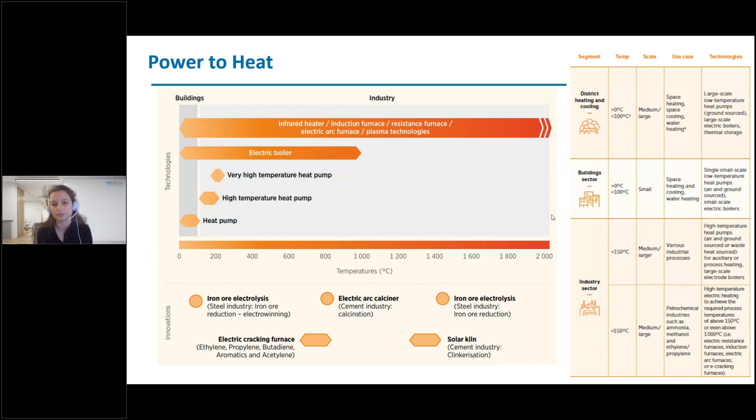Then we have industries that need much higher temperatures than that, and for that there are different solutions emerging, such as e-cracking for chemical industries, or solar kiln for cement industries, among other innovations. In our report, we focus especially on 3 segments: district heating and cooling with medium to large heat pumps as the main technology, the building sector with smaller heat pumps, and the industry sector where we look more at high temperature heat pumps and other technologies for even higher temperatures that are not yet fully commercial or are more underdeveloped.

But heat pumps are key for electrification of buildings and for power to heat when we talk about lower temperatures, because they are highly efficient. They provide the heat requirements in buildings, and they also have a reverse mode for provision of heating and cooling. So we see the prospects for heat pumps are huge.

Today we have electricity share in buildings at 34%, but we need to increase to 53% by 2030 and 73% by 2050. That means much more heat pump deployment in buildings.

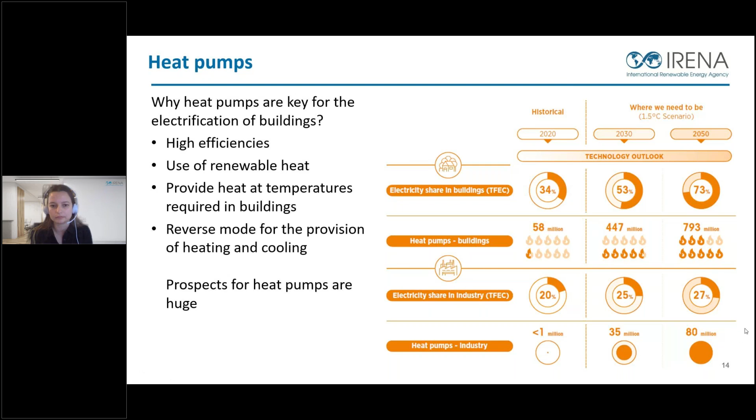For example, in the number of heat pumps, IRENA study says that today we have around 58 million heat pumps deployed, and we need to reach by 2050 almost 800 million. So a lot more deployment of heat pumps in buildings, but also in industry, as you can see, from less than 1 million today to 80 million in 2050, along with further improvement in higher temperature heat pumps.

Heat pumps are also becoming more and more competitive. We see relevant cost reductions in the markets on heat pumps, and that heat pumps can benefit enormously from economies of scale. In this graph, you see how the cost in existing buildings and new buildings in Germany drops from smaller heat pump capacity to larger capacity, and we see a significant decrease as heat pumps get bigger. So economies of scale is an important factor.

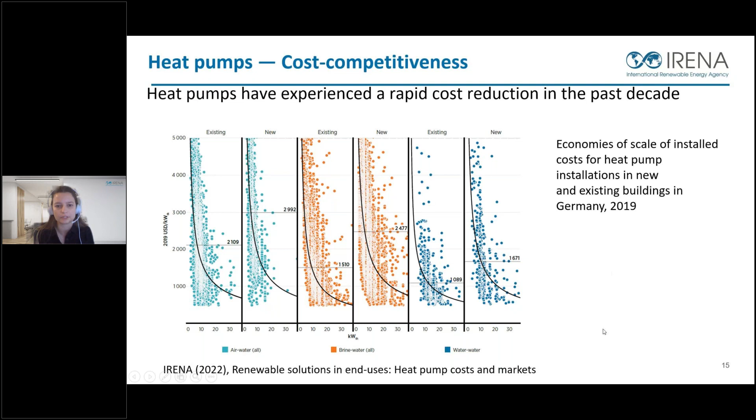Also, there is no big difference in the cost of heat pumps in new buildings versus existing buildings. So electrifying and retrofitting the building through electrification of the heat is not a big difference in cost, as can be a misconception. But we're not talking about the envelope and the increasing of energy efficiency of the building.

But outside Europe as well, heat pumps are picking up. In China, in 2018, 48 million room air conditioners were sold, and heat pumps also saw an increase in recent years. In Japan, already 86% of households have at least one room air conditioner unit. Japan is probably the region with the most heat pumps. And in the US, we see heat pumps reach almost 4 million in 2021, more than twice what was in sales in 2010.

Coming back to the systemic innovation approach, here with what we identified in the report, the 35 key innovations that we show to policymakers are important for creating a smart electrification strategy for electrifying heating and cooling in their countries. As I mentioned, we identify innovation in technology and infrastructure, but it goes beyond that.

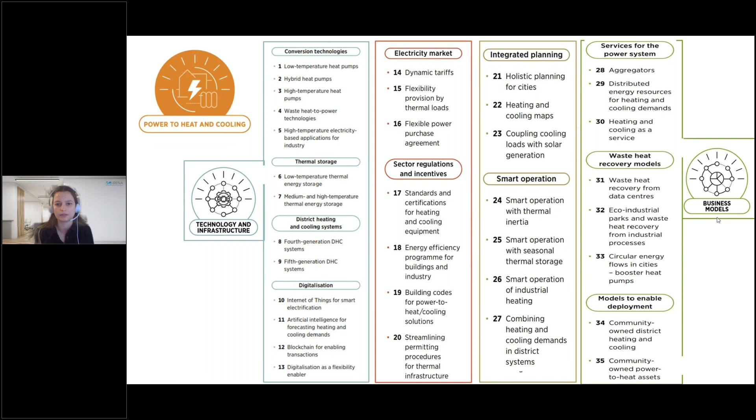On the business model side, we look at different services that heat pumps can provide to the power system and can receive remuneration for that. Waste heat recovery models are very important to increase efficiency, and also different models to enable deployment. So I will not go one by one, but this is the list of 35 key innovations that we identified in the report, signaling that these are important for policymakers to look at the whole picture when they want to smartly electrify the heating sector in the country, and to make sure elements for a practical on-the-ground solution are covered.

System planning and holistic planning for cities, aggregators - these are a few innovations important from the beginning, because of course they don't go through all 35 innovations at once. There are also steps, some come later, some come depending on the low-hanging fruit, but there are a few that are in an essential kit.

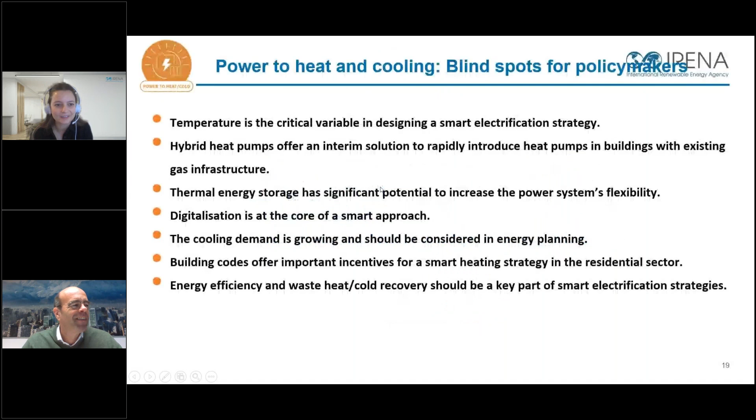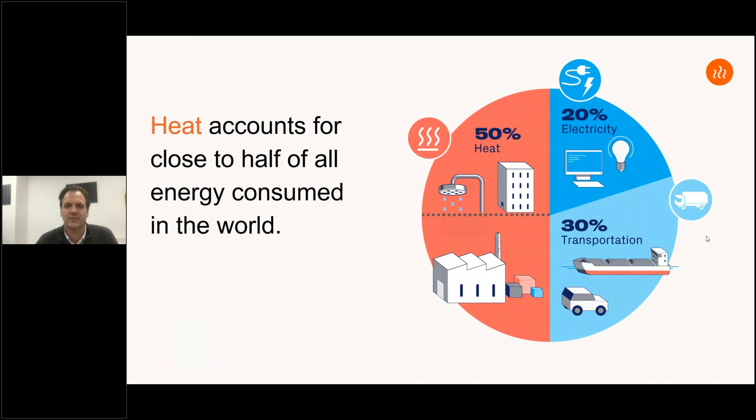Heat is an essential ingredient for many production processes, from brewing beer, pasteurizing milk, dyeing clothes, or sterilizing medicines. Heat accounts for close to half of all energy consumed in the world, and of that half is domestic, with the other half industrial. The industrial sector requires hotter temperatures than domestic, and displacing this has been one of the greatest challenges to industry as it shifts towards a greener path. Businesses are desperate to escape volatile energy costs and are under enormous pressure at board level to hit net zero.

Energy storage unlocks cheap energy from on-site solar, especially given the plummeting cost of solar, and in Caldera's case, not having to connect to the grid. Caldera gets away from this need by creating a separate microgrid with connectivity to the main grid limited to its existing size, absorbing all of the solar load directly into storage. This means no waiting for costly grid infrastructure work on solar projects. A 20 megawatt solar array can now work with a 1 megawatt site-to-grid connection.

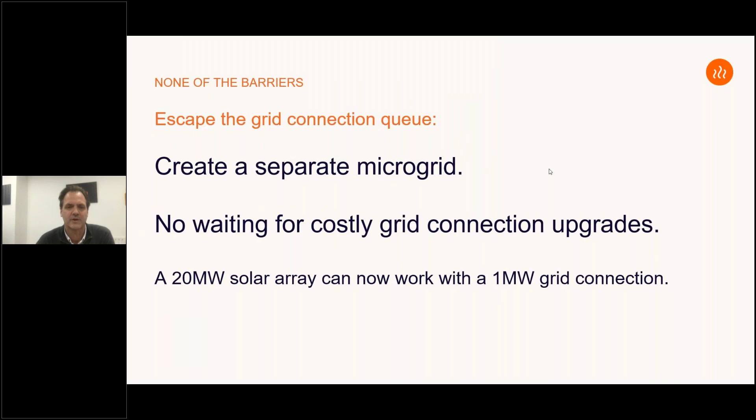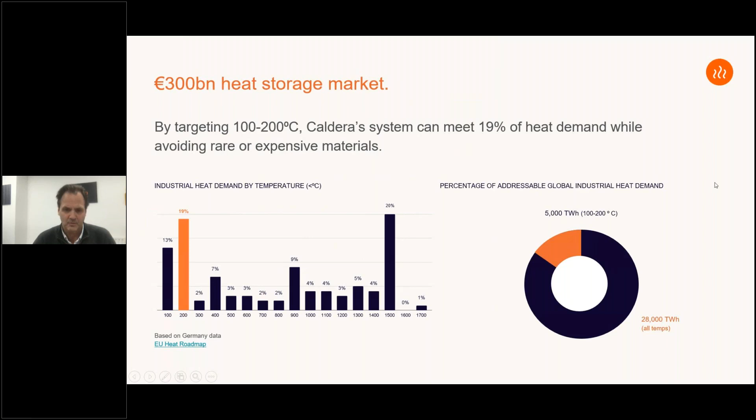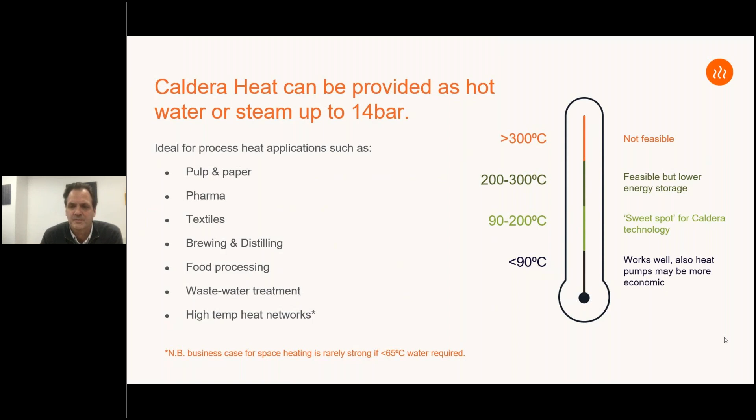If you go higher, you get into specific industries, such as cement production at around 900 degrees C, and glass and steel at 1500 degrees C. The ideal target for Caldera is between 100 and 200 degrees C, which represents 19% of this energy storage market, and that's large. It consists of most factories with steam networks providing up to 14 bar steam and 200 degrees C, covering processes in pulp and paper, pharma, textiles, brewing and distilling, food processing, and waste-water treatment.

Caldera has developed a commercially viable product that can be easily deployed and scaled, and we're looking for early sales. Our systems are modular and expandable. We locate them close to where the heat is being used, transferring solar field energy using high voltage electric cables directly to the stores. Each store can provide 4 megawatt hours of storage, charging at 1 megawatt and discharging at 650 kilowatts. We combine multiple units to create larger storage systems up to 200 megawatt hours with the ability to absorb 50 megawatts of power. The whole storage system is around one third of the cost of lithium-ion batteries.

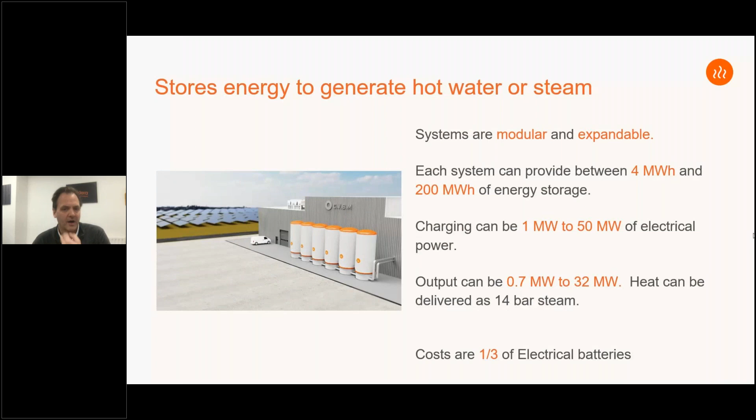What I'd like to do now is take you through a business case, a factory we've been looking at within the UK, where we can say that even with the British sunshine, we can get a good business case. The example shows a factory with a €2 million per year energy bill that can be reduced to €1.2 million with 5 megawatts of solar and 4 megawatt hours of storage deployment. That's a €0.8 million saving with a 27% carbon saving and a simple 4.4 year payback.

Looking at the detail, you can see how the 5 megawatts of solar and 4 megawatt hours of storage result in a cut in emissions of 27%.

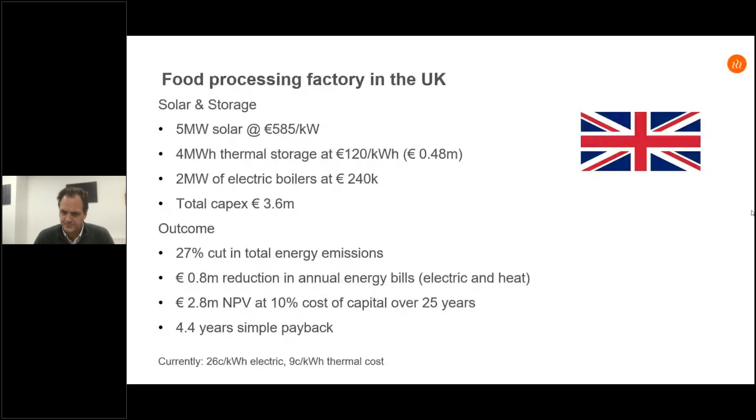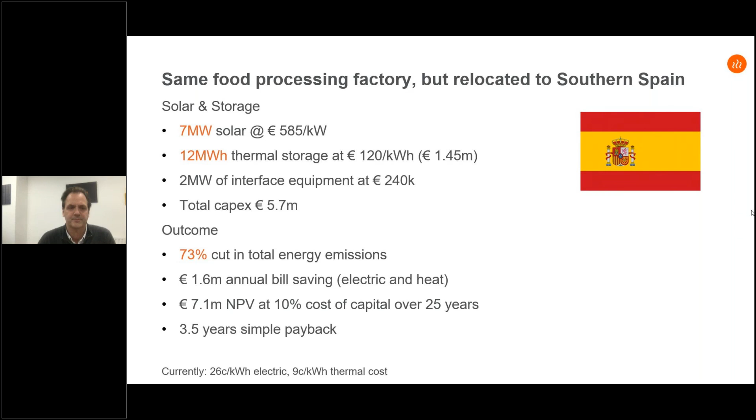Now, if I was to move this factory into Spain, the economics get much better. Clearly, with more solar available in a sunnier climate, we can deploy more solar, 7 megawatts, and more storage, 12 megawatt hours, allowing us to get to a massive 73% cut in total emissions and with a better payback. So if I can magically move my UK factory to Spain, I have twice the savings and nearly three times the reduction in carbon. And for solar developers, that's more solar deployed.

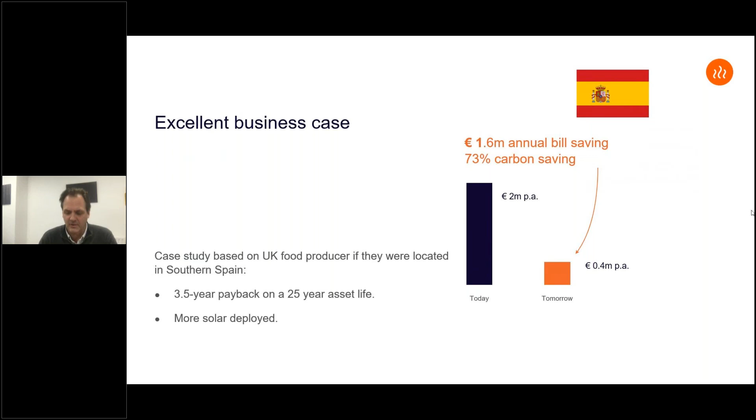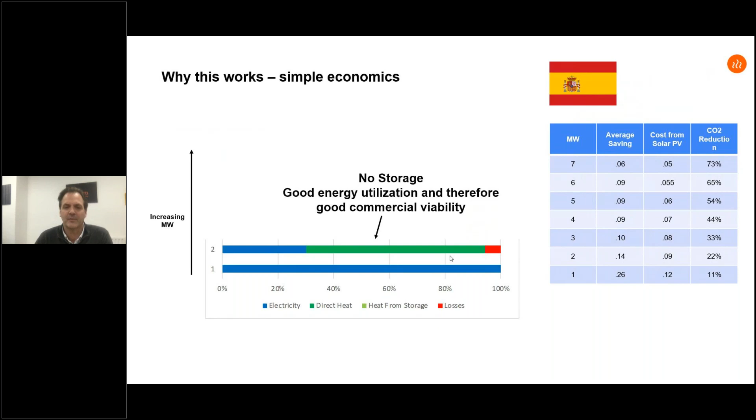Why does this work? Let's have a look at the numbers. As we increase the solar deployment, for the first 1 to 2 megawatts of solar we've got no storage at this point, and all the energy can be used directly, either as high value electricity or as direct heat through an electric boiler. At 1 megawatt of solar, the 1 megawatt grid connection can be used to a maximum. At 2 megawatts, the additional power generated can be used as heat, with the high value electricity being used first. Each bar of additional solar shows the percentage of energy that can be used, and the red shows losses incurred from clipping at the solar end or heat losses from using direct heat, but they're small at this point.

As we increase the solar deployment, there's good payback when you add more storage, with losses ever so slightly increasing. You can see that as we increase the solar deployment, the average saving falls, but the cost remains under the saving, so it stays a good commercial payback.

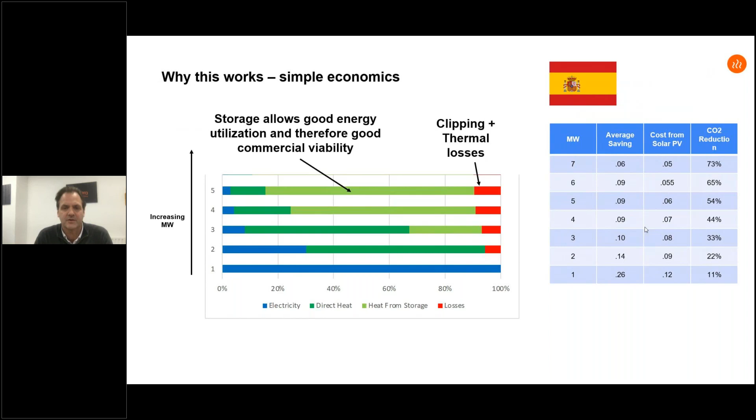As we increase to 7 megawatts of solar, there is suddenly no longer a commercial payback for additional solar and storage, with savings not covering the costs of additional storage and the solar power now needing to be clipped or thrown away, as seen by the red line. We have, however, reached a massive 73% reduction in CO2, and the value of increasing this number further now becomes a marketing one as opposed to a commercially viable one.

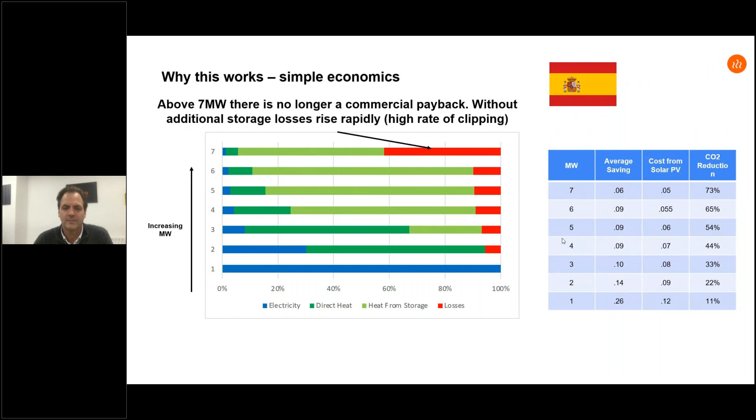What we have done is identified that 2.5 to 3 times more solar can be deployed on the site with storage than would otherwise have occurred, and the commercial trade-off for CO2 savings has been identified.

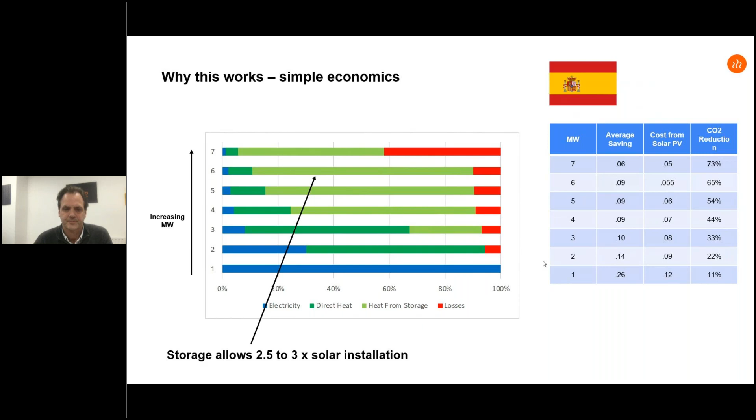So today, I want to leave you with two conclusions from an energy storage developer to solar developers for industrial sites. That is, thermal storage allows 2.5 to 3 times the solar installation that would otherwise have been deployed, and thermal storage allows solar installation without grid constraints, both in terms of cost and time.

We're interested in hearing from existing projects with potential to implement early stage storage system deployment. We're in discussion with several sites for first deployment in the UK and Europe. We're obviously looking for projects closer to the UK for better initial system support, but we're still looking for the ideal first deployments, so if you feel you've got something of interest, please don't hesitate to contact us.